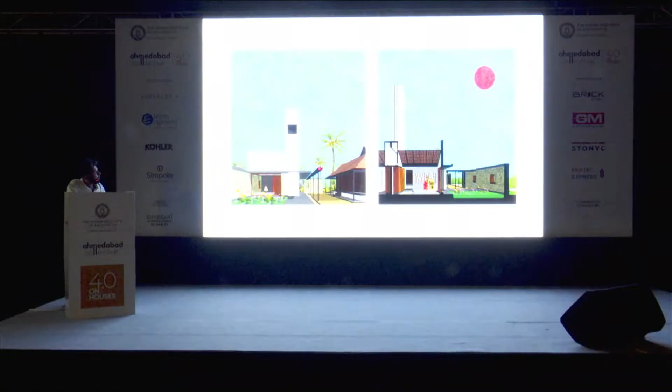But although received with great passion, the idea never took form. And after a painstaking year of drawings and conservation work on site, Kapi Madam was demolished to be replaced by another concrete structure. We withdrew from the project in the only form of protest entitled to us.

We were so naive. The project and the old structure are now lost, yet its loss was trying to materialize through other means.

The absence of Kapi Madam slowly insinuated the melancholy of its lost architecture, both the old and the new, in various forms of drawings that we did, artworks, graphical renderings.

By drawing an analogy to Aldo Rossi's 1975 engraving, Now This Is Lost, also known for its melancholic stance towards architecture, Kapi Madam now moved to its afterlife and began to inform our thinking and drawing in our practice.

Its next apparition was in the form of an artwork created in the stark, mute, melancholic, metaphysical painting style of Italian artist Giorgio de Chirico, whose work also was an influence for Aldo Rossi.

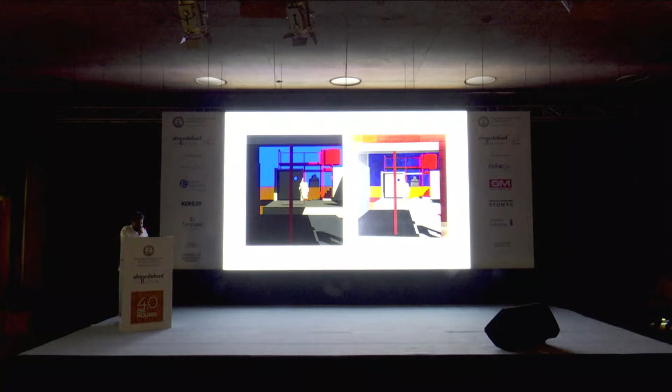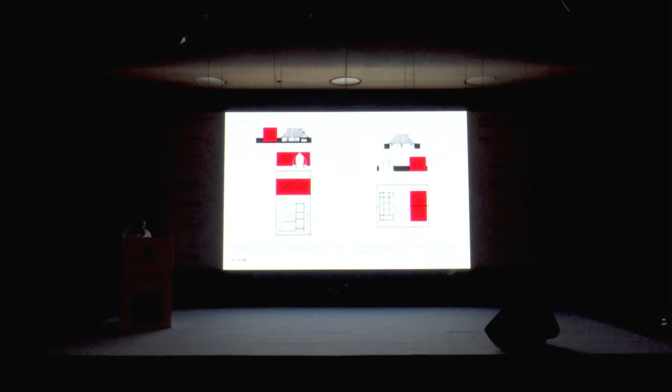Later, we adopted this style and method for various other projects and their artistic renderings. We also developed a typological method of studying and drawing a set of spatial guidelines and principles of order that manifest in our projects as logical conclusions and continue to inform our design process.

Perhaps stemming from our own naive and amateur understanding of the underpinnings of traditional houses like Kapi Madam, we started studying some of the generic qualities that the house itself presented.

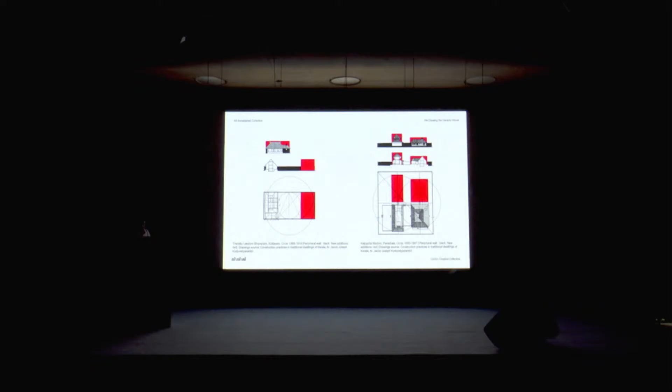Seemingly non-denominational rooms of equal sizes arranged around courtyards or verandas, which were interchangeably used by the members of the family in different ways during the daytime and nighttime.

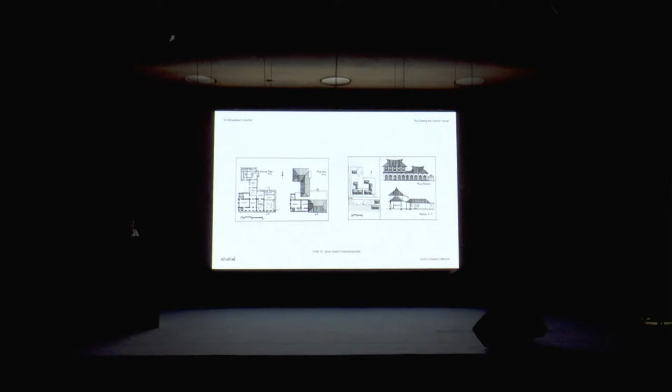We extended the study to several traditional type forms of houses, the Ekashalas, the Dushalas, the Trishalas, the Chatushalas.

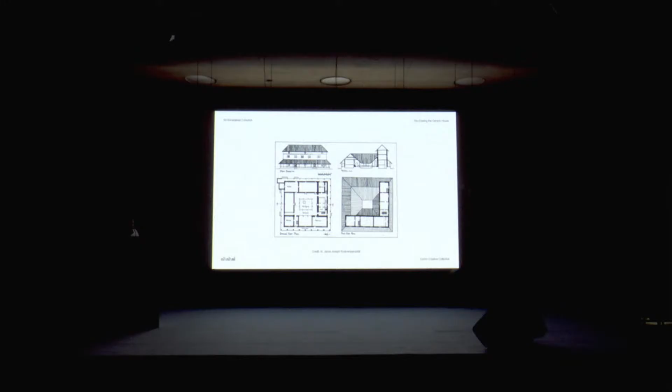Architecture, when unburdened from its past, history, and socio-cultural connotations, begins to exhibit some of the more universal spatial qualities of spatial order in its morphology.

Most of these houses also followed certain strict principles of climatic response and material tectonics, which were necessary parameters to build in the landscape of Kerala.

However, a deeper understanding of these houses, set in its historical and socio-ecological context, reveals meaning that is far from universal. They are formed and governed by domestic spaces and systems separated on the basis of gender, caste, and economic privilege. The red marked border, for example, here is where the female of the house should always exist.

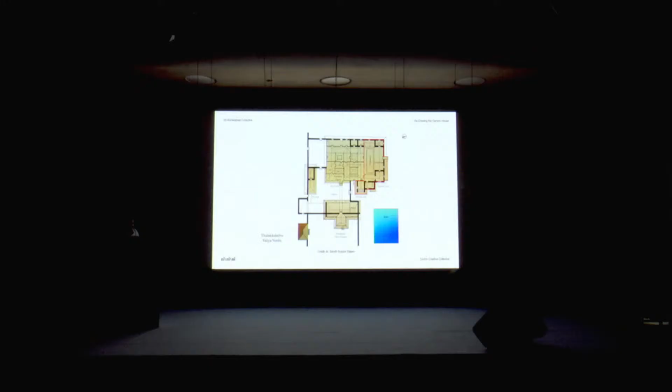So, three attempts that we start in our practice. We started questioning if an intimate knowledge of this power system prevalent in the traditional house forms could help us in the search for the truly generic house, one that is more equitable and universal.

Our attempt began with the sensibility of building with the presence of the old. How can time and memory become generators of design?

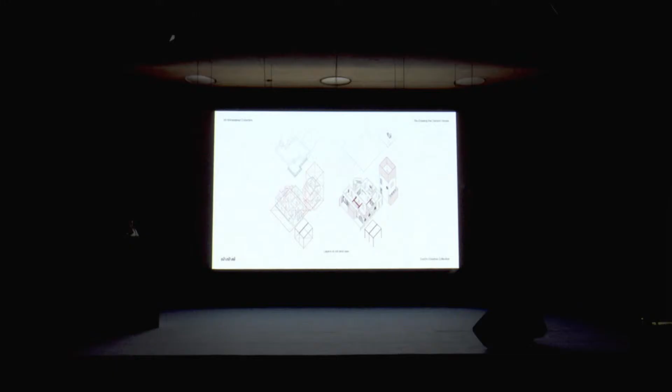Aldo Rossi, in his book, A Scientific Autobiography, quotes, 'The question of the fragment in architecture is very important, since it may be that only ruins express a fact completely. Photographs of cities during the war, sections of apartments, broken toys, this ability to use pieces of mechanisms whose overall sense is partly lost has always interested me,' Rossi says.

Even in formal terms, I'm thinking of a unity or a system made solely of reassembled fragments, says Rossi.

The notion of the fragment in Rossi's words speaks of the emotional essence of the home when read in parallel with the Austrian poet Rainer Maria Rilke's description of intimacy.

In the 1990 house, originally built as a working class residence in the rural outskirts of Tiruvalla amidst sugarcane farms, fragments of memory served as the symbolic core.

Like the traditional house typology, the 1990 house also seemed to exhibit certain recurring themes and logic of spatial order. A typical structure, the style of which is found in Kerala even today. The house is a single-story concrete slab house which is a 9-grid in plan where private rooms are arranged around a central hall. This house is my partner's own house.

The significance of the story of the existent house was important, and its memory formed an integral part of the new narrative as we considered our responsibility for what we choose to leave out. We withheld the urge to romanticize the image of the past and rather chose to use its remains as a stimulus to present a new aesthetic interest and a modern philosophical interpretation.

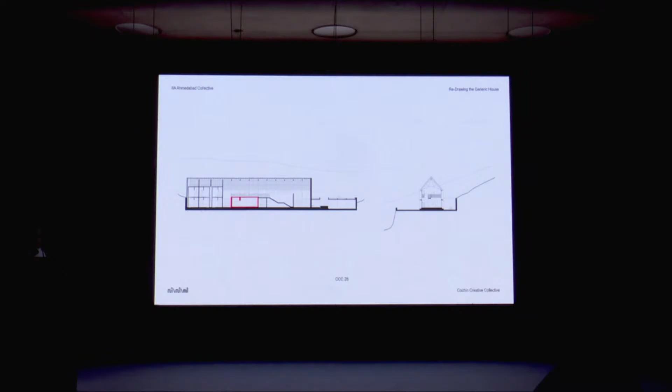The new architectural expression simplifies the whole into regular forms and strongly distinguishes the old and new as separate layers and materials. Concrete cement blocks, steel and glass used for the new construction now sit in absolute contrast with the stone walls of the old construction. The dialogue between old and new realized here is a conscious effort to create a unity made out of fragment.

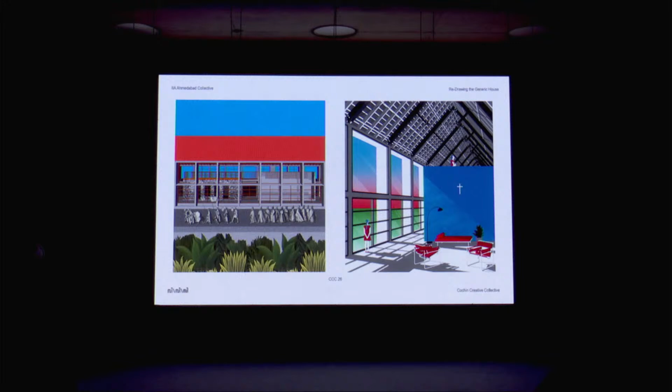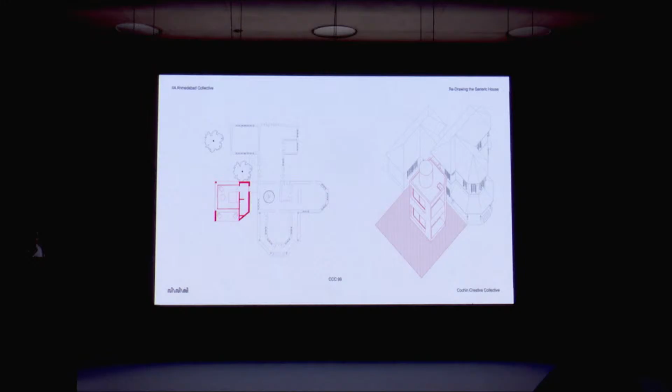Similar ethos prevailed while adding a new modern private bedroom block for the next generation inheritors of an ancestral home in Chalakudi. The new block's total dimensions was directly governed by the geometrical relationship with the old house.

In our subsequent studies from Kappimadam, we developed a method of abstracting ideas and types which began to make their presence felt in different other projects as constants but manifesting in varied ways. We developed a kit of parts which started to emerge every now and then in our projects, each time giving rise to a new meaning and responding to the specific needs of the project, site, and client.

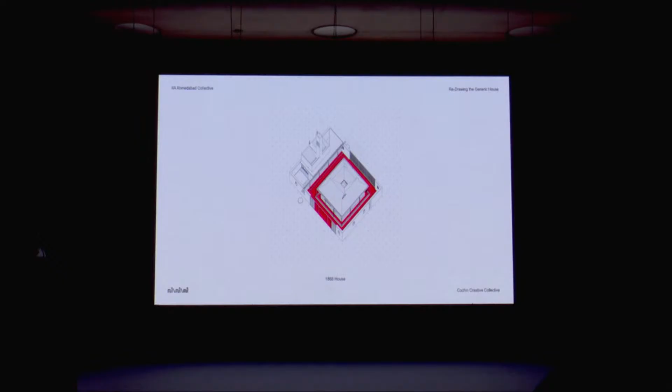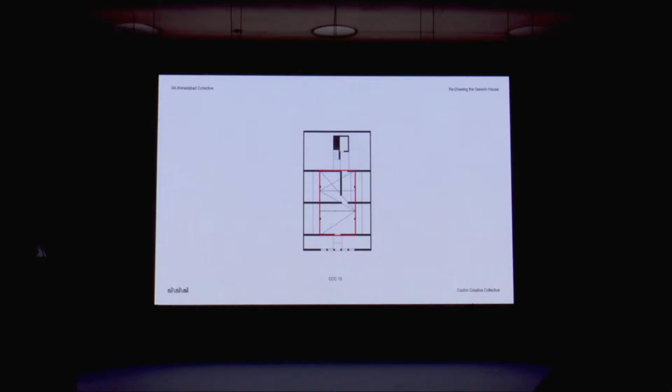One such logic of spatial order was that of the designation of private and public space as distinct forms. In most cases, there is a precisely equal measure proportioned spaces allocated to each sector, especially evident in some of our linear house typologies we have tried.

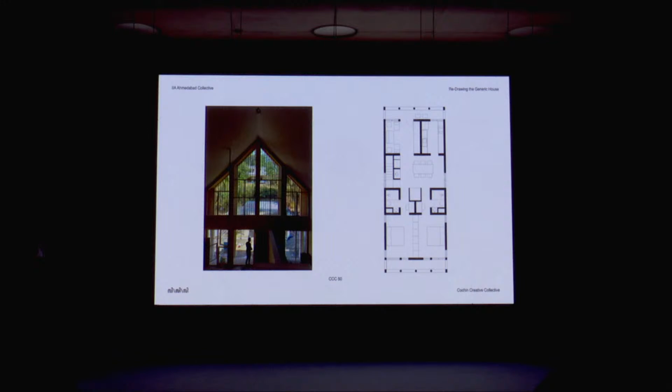These longer typologies share a similar proportioning system on the plans, with generous living spaces distinguished in height from private spaces. This family space, for example, in the Punalur house, measures almost a near perfect cube in its proportions. Similar systems are in place for two other houses in Tiruvalla.

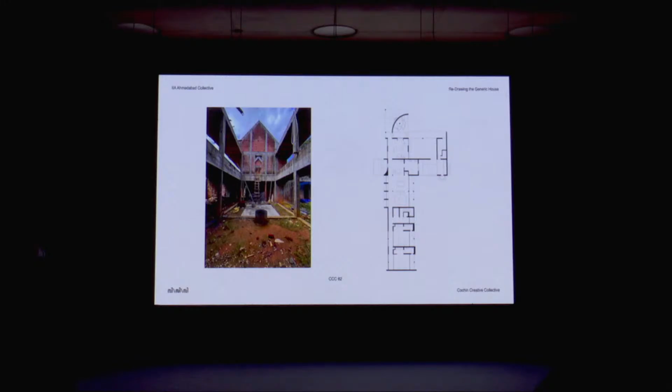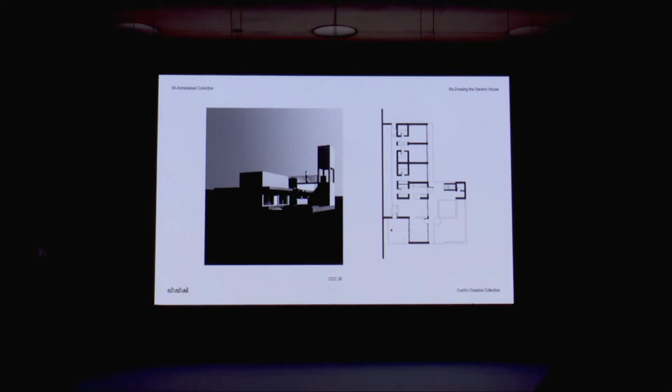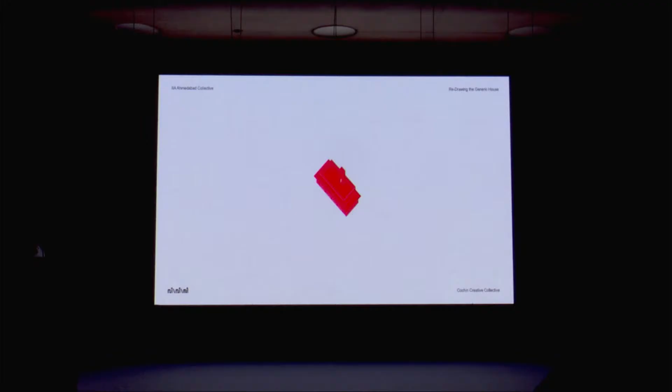In Cheppanam House, this typology graciously invites a courtyard and bold shapes within the composition. All of these elements and tools of organizing are derived from our continuing study of projects built and unbuilt. In this way, the recurring element of drawn projects began to exert their existence in the present. Recurring architectural forms that emerged in consecutive projects, upon their demise, are distilled and recorded in a new metaphysical plane.

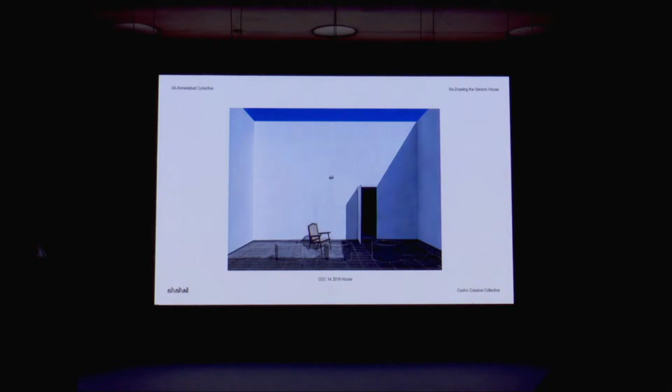Another construct was that of the room under the sky, something which began recurring from the deep pit we earlier redrew of our old project, the Kappimadam. At first as the leftover space in the roof of the Chammanad house, but in the subsequent project, it started claiming a more central and significant role in the house.

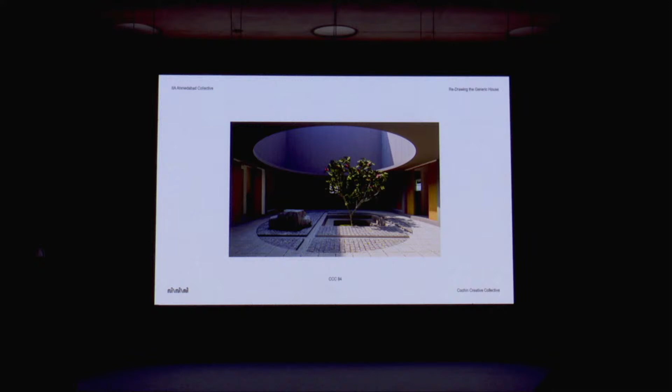For instance, in the Tekkumkara house, it not only became the physical center of the building, but it also is the emotional core, owing to the fact that it was built over the traces of an old house that stood on the site. The marking of the ancestral house were drawn and engraved into the courtyard, which brings the light, rain, and the breeze into the residence.

In the Changanasheri house, the room under the sky is a garden, providing a green lung in a tight site, which otherwise could not provide a green space on the ground. This here is the terrace of the house.

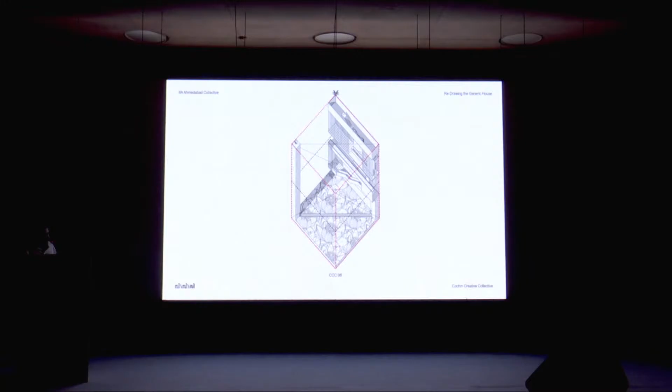What are the many different iterations of the boring cube? An academic exercise, the solo house with an inhabited wall on one side, a tower and a field reinforces a cube placed in solitude in space and time on a metaphysical landscape.

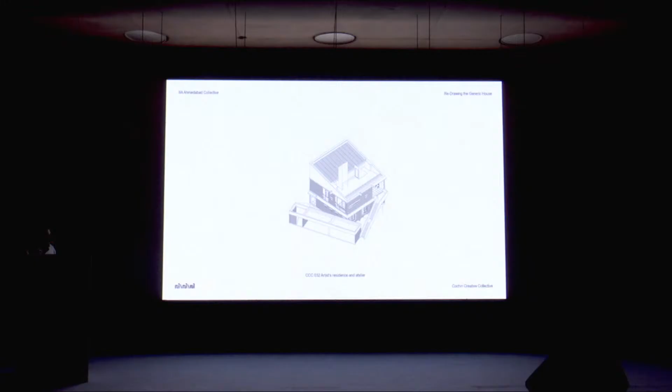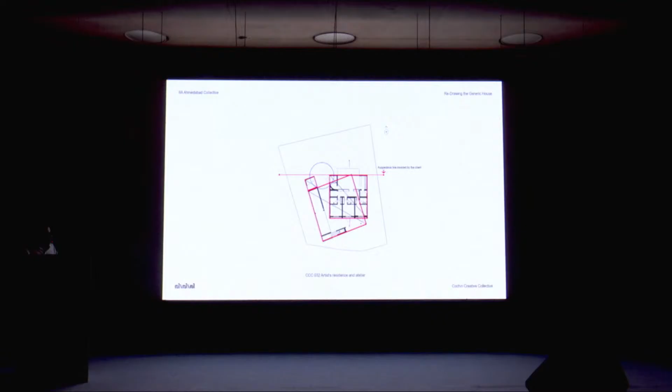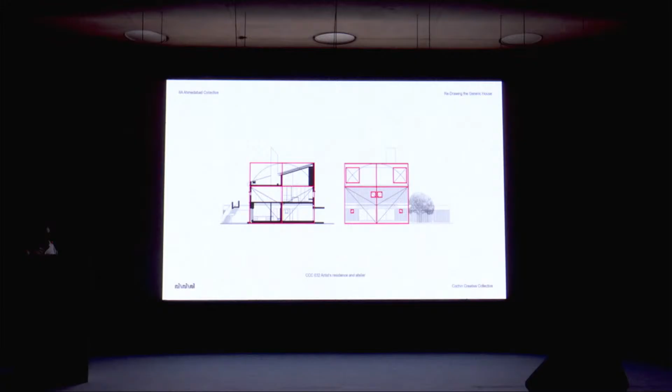Another attempt, the artist's residence and studio, is an exploration of modernism in a tropical context. The plan is composed of a cluster of additive forms with juxtaposing geometries. The carporch and staircase, set along an auspicious east-west line, set the composition. The main house, square in plan, creates tension with its auxiliary components. The house form is a bare cuboid, or rather the remnant of a truncated cube with symmetrically articulated openings.

The square plan is a humble version of the 9-grid, simultaneously taking care of the house function on the ground level, while the upper level houses the artist's studio. The humble 9-grid spatial layout is enlivened and made unexpectedly sumptuous by the elegant expression of its volume and the precision of the fundamental parameters of symmetry, order, and repetition.

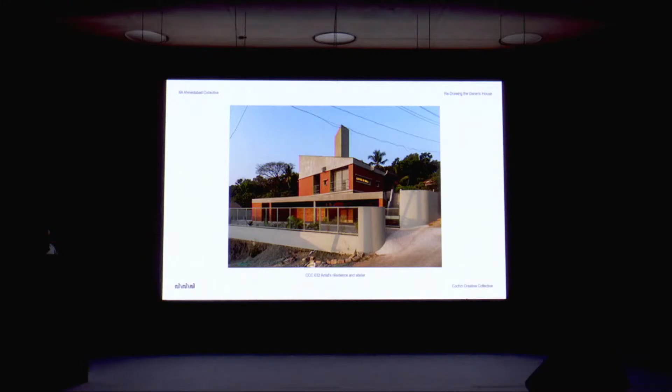Located in a compact mid-sized plot on the city outskirts, surrounded by a verdant landscape of green fields, it stands as an object in the landscape.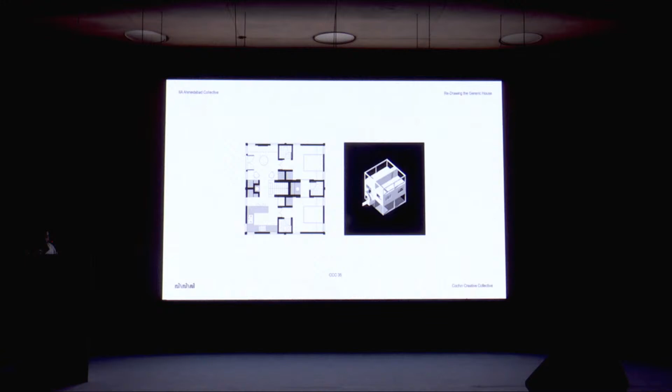More objects in the landscape followed, this time in the flood-prone areas of Alleppey. The house on stilts is another 9-grid, almost anticipating the later projects to follow. Another house in Ollur and a house in Edatwa loosely follow the same line, with the latter showing further interest by absorbing and standing up on an interlocking cylinder form at the center.

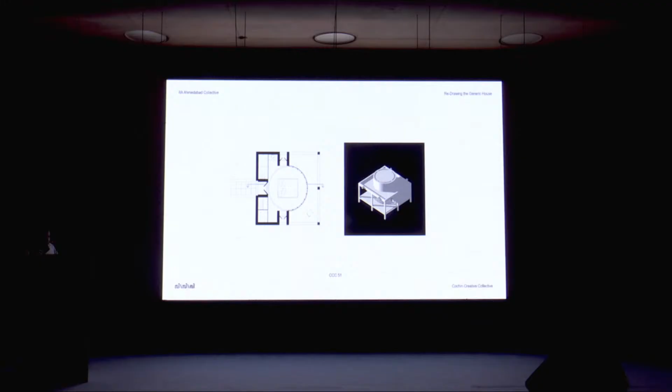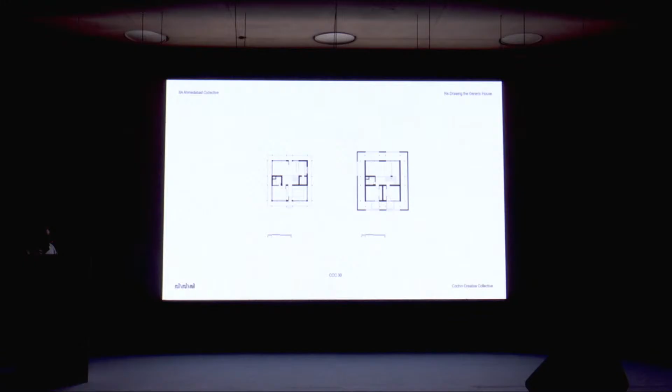The house in Puthankurus consistently builds on all the cues developed within the cube iteration attempt. We have used the cube time and time again in various manifestations to suit the requirements of different clients, and each time it has provided appropriately suited results, particularly in the first option of the A2 Manur house. The form emulates the geometry of the traditional house marked in red, with low hanging eaves, and the volume of the house matching the height of the pitched roof.

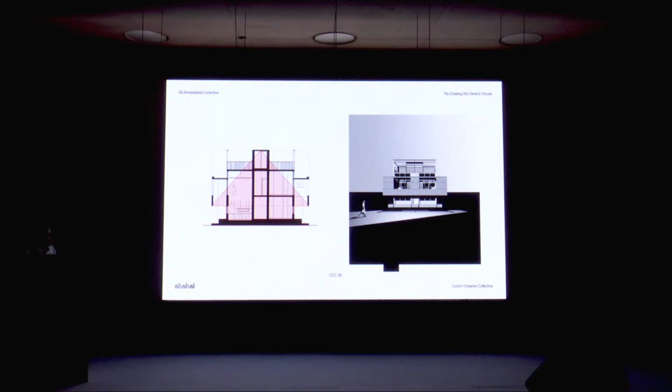Another attempt was the autonomous blocks, a way of assigning individualistic formal definition to different programs within a domestic setting. In Kanyampura house, the private spaces of the bedrooms are enclosed within cuboids placed within the more open plan layout of the house containing the social spaces.

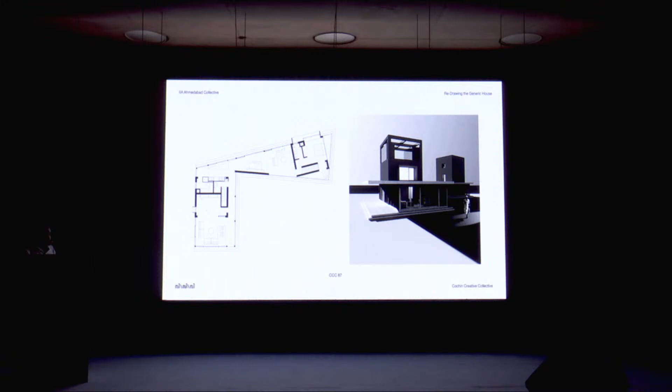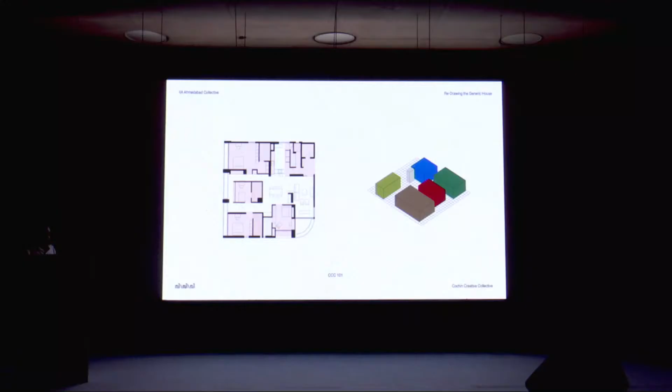The same logic applies in the interior design of an apartment interior, where each room takes on a hue of color and expression. In the Trikakara house, in an attempt to save the trees on the site, each program is assigned a more or less equal bay and arranged with least disturbance caused to the trees.

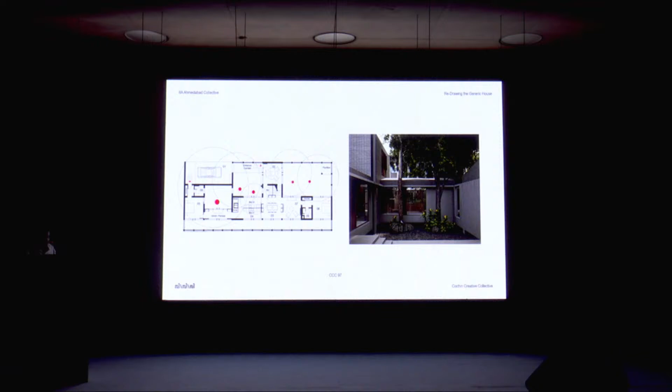The last attempt relates to one of the most prominent themes that stood out through our study of traditional houses in Kerala: the absolute, indelible presence of hierarchy in the organization and usage of space. When scrutinized as just objects devoid of any baggage, these houses tend to present a non-hierarchical ordering of spaces. But in reality, life never unfolds that way.

Across all religious communities, houses such as these were built for the upper section of society only, and displayed a blatant division of space according to the place and position afforded to each individual in the house. We wondered if it was possible to rewrite these spaces and make them more democratic and equitable.

We always loved the works of Italian radical architects Archizoom and Superstudio. Their visionary practices professed a new polemic of democratic, non-hierarchical spaces that remain relevant to this day. Their result has been an influence on a generation of architects like us, thinkers and practitioners. One of the most iconic works to come out of this was Superstudio's universal grid, a generic plane that would absorb everyone and everything.

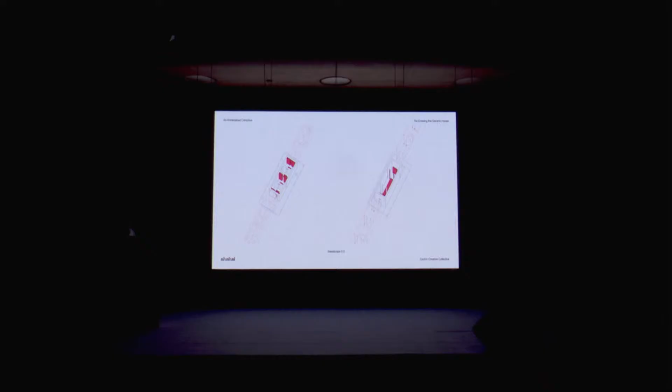The residence at Cherthala is a critical experiment along this line of investigation that we engage in within our practice, exploring a non-hierarchical, inherently democratic, and seemingly infinite multiplying space. We perpetually experiment on the idea of the universal room that is devoid of program and context.

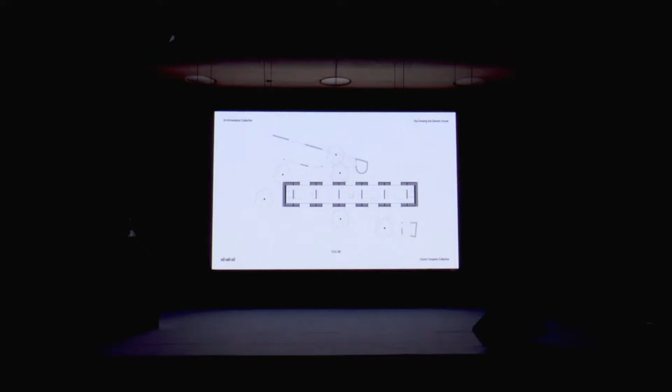Resembling the traditional houses of Kerala, which are organized in a series of rooms one after another, the rooms in this atelier house also follow a strict linear order. This is also a house for our dear architect friend, who is also a photographer.

Not only are these rooms identical in size and volume, they are interchangeable in regard to function. It can turn from an intimate bedroom to the social space of a kitchen to the entertainment venue of the living room.

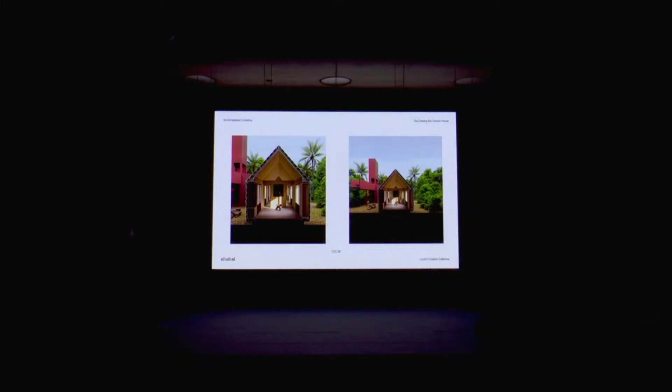In order to emphasize the similarity of the rooms, the entire built structure is imagined as a monolith by restricting the building to a limited palette of materials. The walls and roofs are both made of terracotta tiles. Endemic to the tropical context, the window openings in the monolithic form are lined with red sandstone to camouflage them into the singular form.

On the inside, the surface is lined with birch plywood on the walls and ceiling, and cement tile flooring matching its color. The use of mirror surface in the last room also ensures the illusion of infinity, extending space to infinity, as in the monumental landscapes of Superstudio.

But in the 2020 house, the question of hierarchy is reversed. The question of hierarchy was brought to the fore again, rather than relegating domestic functions such as cooking and eating to the back of the house, hidden from view, as seen in traditional houses. In the 2020 house, it became the center of the house itself.

One of the most primitive and symbolic cosmic centers of a home is often the hearth, the form of which varies from place to place. Resonance of the hearth can be analyzed in many iconic works of art and archetypes of home, making it one of the most primitive aspects of dwelling to have continuously re-emerged in architecture through time.

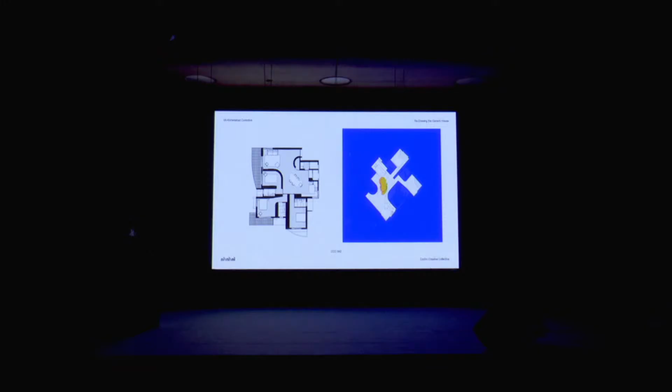Our logical interpretation of the hearth as an architectural element was in the form of the table. The symbolic and functional role of the table as the stage for cooking, eating, playing, working, doing homework, socializing, and so on brings together the most intimate functions of a home.

In this house, designed for a globe-trotting couple, their daughter, and their collection of books in the seaside city of Kochi, Kerala, the table fulfills the role of the hearth and becomes the heart and soul of the space. Being a very close-knit family of three, the centrality and vantage point of the table draws them close together at any time for shared activities of living.

The table becomes a bespoke, sculpted element distinct in its materiality, finished in polished wood. It exudes warmth and intimacy, evoking our deepest memories and architectural experiences of the kitchen and the home. The white, seamless walls seem to flow from this sacred core, forming a pristine and pure architectural form, seemingly devoid of the burden of contextual gestures.

The expression of the house as a monolithic space emphasized the hierarchical prominence of the hearth. As a first strategy, we brought down walls in the common areas and introduced a curvilinear geometry of white plain walls. This achieved an uninterrupted spatial layout bathed in abundant natural light.

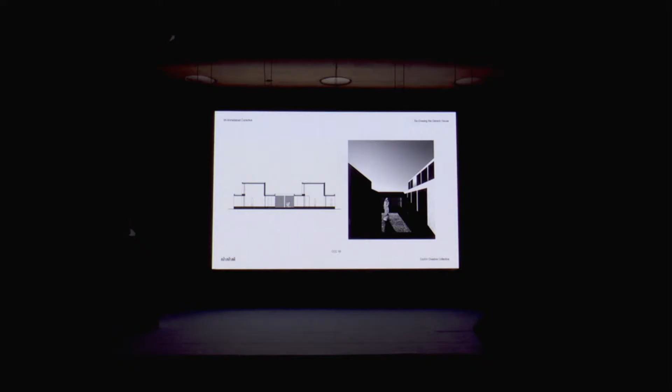In the Perambra house, set in a lush landscape surrounded by paddy fields, one sees the simultaneity of the presence and absence of hierarchy. The young client desired a space of refuge to be placed in the landscape, which could elevate the experience of the surroundings from within the home.

The rectangular form of the house was placed parallel to the paddy fields on the western side, and from its length, an excavated square court formed on the right side, that is on the east, in the presence of a grove of areca palm trees and a mango tree.

The service spaces, such as kitchen, bathroom, and study, were placed on the eastern side and expressed a solid edge cutting the view of the paddy field as one approaches the house.

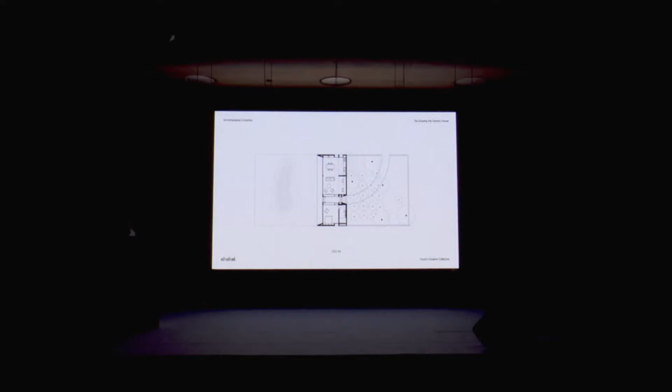The living, dining, and bedroom spaces are placed facing the open side with an ever-changing view of the paddy field and lush greenery. The non-denominational nature of the program is visible here, with every room getting similar access, view, dimensions, and light quality.

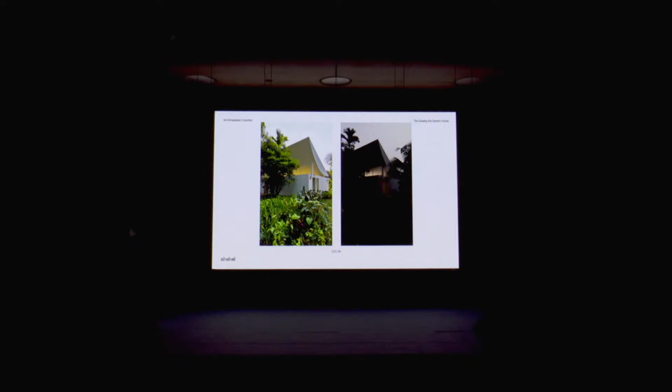To welcome the dappled morning light on the eastern side, trickling through the canopy of the large mango tree, the roof was imagined as a part circle, gently curving. The surface of the concrete roof gets washed in the morning light as well as the evening light. It appears to be levitating.

At the lowest point of the curved roof, it swoops down to frame the view of the paddy field on the western side.

As one enters the house, the panoramic view is emphasized by the form of the curvilinear roof floating on top of concrete columns. The morning sun hits the curved surface.

The geometry of the universal grid becomes particularly efficient in this new attempt by providing infinite possibilities of arrangement. In the Coonoor house, for instance, every room is offered a fantastic view of the hilly landscape around it.

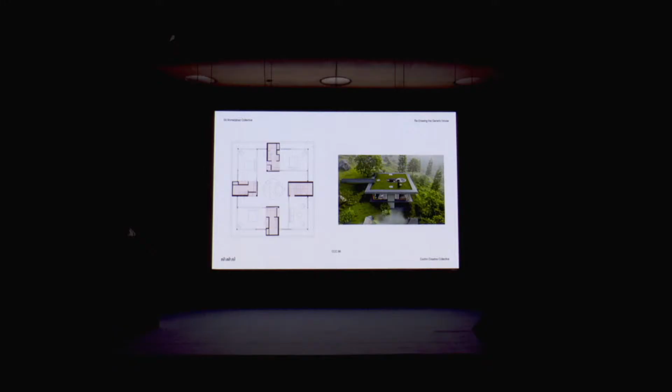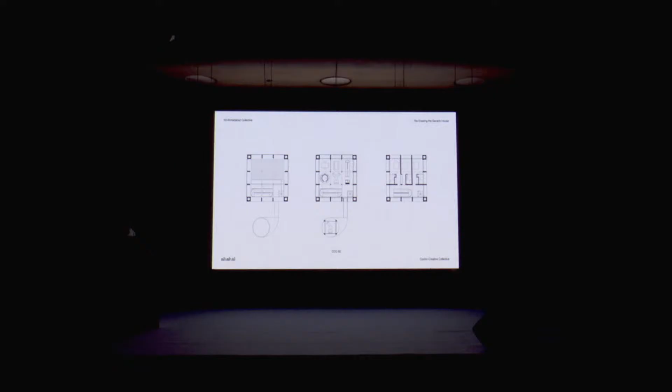The exploration of the grid plan was taken one step ahead in the residence designed for Arun and Ashwati in Ernakulam. It's a 9-grid plan with equal dimensions.

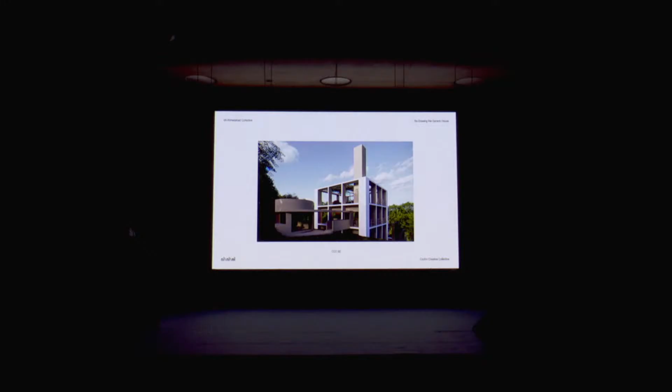This was further extended as a second option for the same client, which became a 16-grid plan with one floor, of individual squares assigned with interchangeable domestic functions.

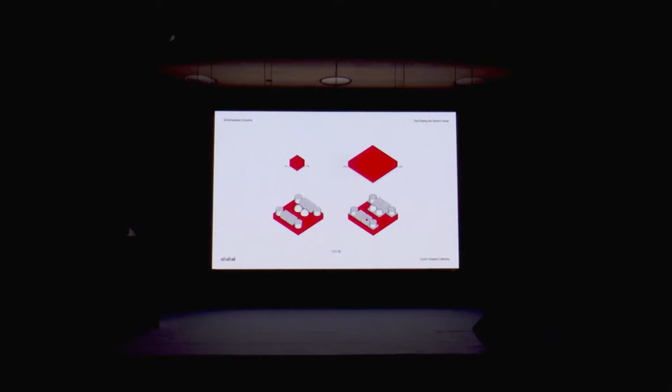Each grid is expressed distinctly with a roof form, forming an almost sculptural insert in the landscape. The roof form also brings in light to the interiors of the house.

Emulating memories of the rooms in traditional houses, where some rooms have doors on all sides leading to other rooms or to the outside, the Arun Ashwati residence becomes a new exploration in the series of non-hierarchical, generic houses that we have attempted.

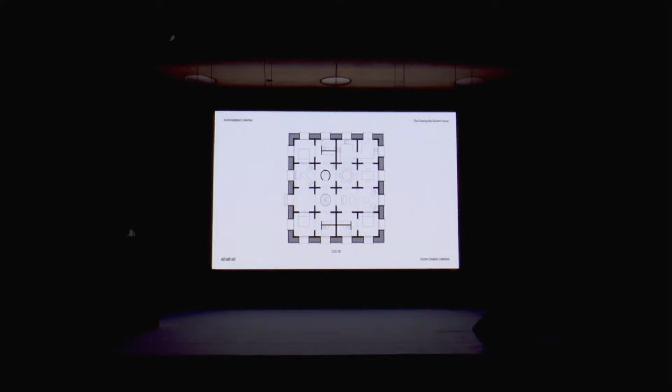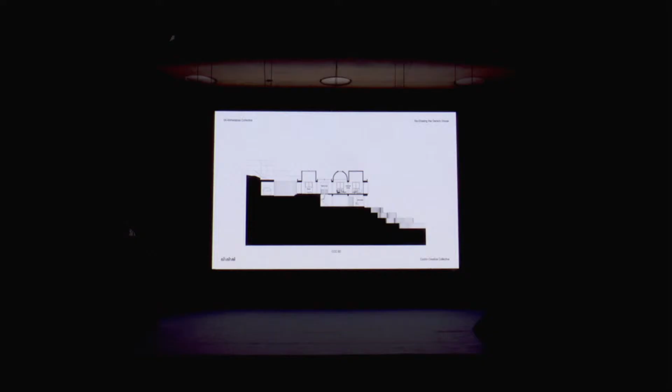Although the rooms are identical in plan, through sections and volumetric expressions, the rooms experience different qualities of light individually, and therefore comes a variation.

There was a sound to this particular. Yeah, there was a background.

Though the rooms are equal in sizes and measure on the plan, the sections make each room individualistic in terms of ambience, daylight.

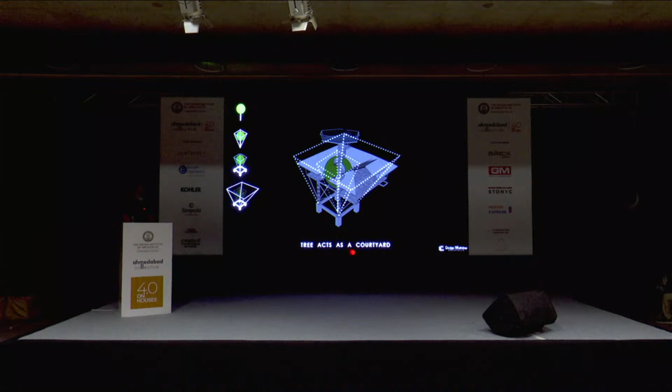So tree is nothing but an inverted pyramid, and the house started happening around the tree. So the tree became a courtyard, and the house is 45 feet above the floor of the forest, because it's on the slope - this is like 45 feet above the forest. It's on 4 columns, and the house happens around it. And this point, which is called the crow's nest, is 75 feet above the ground.

This has been a completely green building. When we did this house, there was no electricity, completely no electricity, no roads. So the whole house was built in Pune - it's a nut and bolt structure. It was assembled in Pune.

Dismantled, brought to site. And that's when it hit me, that when the pieces came, there were hundreds and thousands of pieces of the house, and nothing was numbered. Nobody knew except one guy who had done that. And this place is in a forest.

That's when I lost it - this guy was not even from Pune, he was from Latur, halfway down in Maharashtra. I realized that if this guy walks out for whatever reason, I'm screwed, because I have hundreds of pieces and nobody else knows. The client trusted me, and everything would become junk since there was no way to put it back. So every day I'd leave at 7:38 in the morning, reach the site, and make sure this guy doesn't leave. For the next 3 months of my life, it was only this - making sure he doesn't run away. And he didn't.

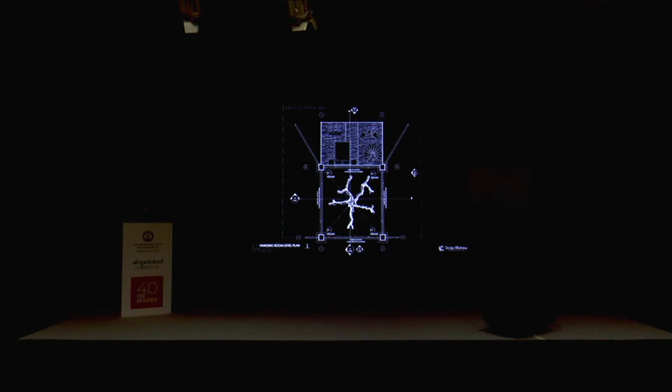So this is the tree. This is like a living, dining, and a bed over here. Kitchen, toilet, staircase that goes down. There's a room which is hanging - it is supported only from the top, it doesn't have any other support. And what you have over here, a staircase going up, is a sleeping balcony.

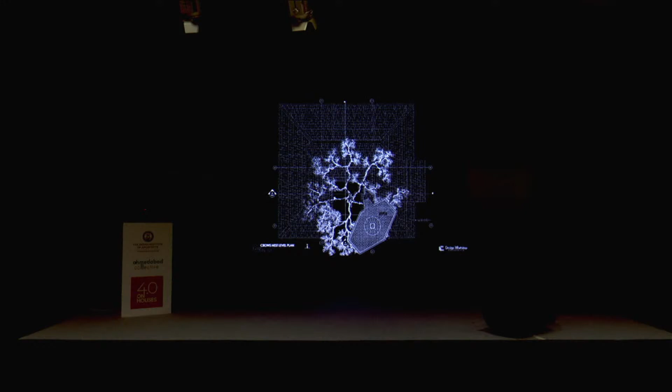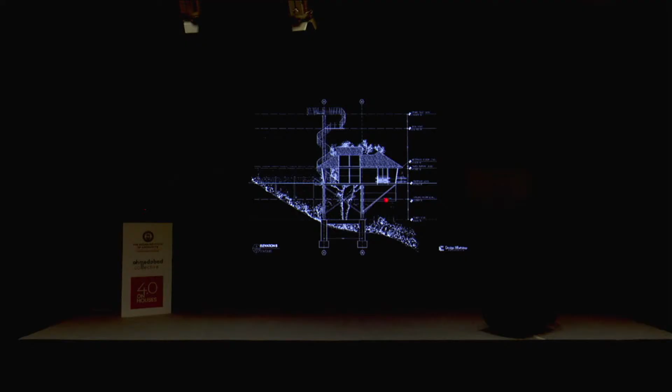And the roof is Mangalore tiles. So again, as I said, there's completely dry construction. That's your sleeping balcony. That's your hanging room - it's suspended from the top. I got a few images of the making of the machan. It overlooks the valley - there's no human construction for miles together.

And in between, for a month, the work had to stop because there was this anti-North Indian thing happening in Maharashtra. All the UP and Bihar guys just left Maharashtra, and the carpenter was a UP guy, so suddenly the whole site came to a standstill. But even with that, we were able to wrap it up in about 6 months.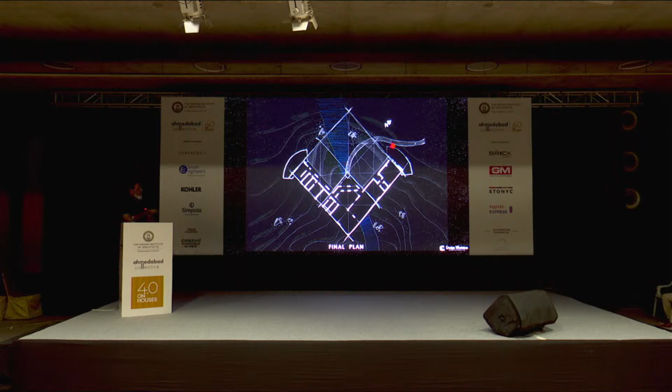So this is your waterfall. There are two wings. One is a bedroom wing, which is private, and this is my living room, kitchen, and dining. You enter through a bridge. You walk down 100 feet, and then you enter the house through the bridge, because there is no road, you can't make a road.

So again, this is your entry. That's the waterfall that comes down. Then from over here it goes further.

So imagine all this steel. Karjat is a very hot place. So during 3 months, when the temperature goes up to 46, 48 degrees, the work would start at 7 in the morning till 11, and then again at 5 in the evening till 9 at night, because the steel would get so hot you couldn't handle it. There was no way to build it otherwise.

And as I said, it took me 9 years to complete this. We started in 2011, and completed it in 2020. And again, with the belief of Satish, the owner, this house was not possible otherwise. Somebody else would have just given up. So yeah, this is Satish, the owner of it.

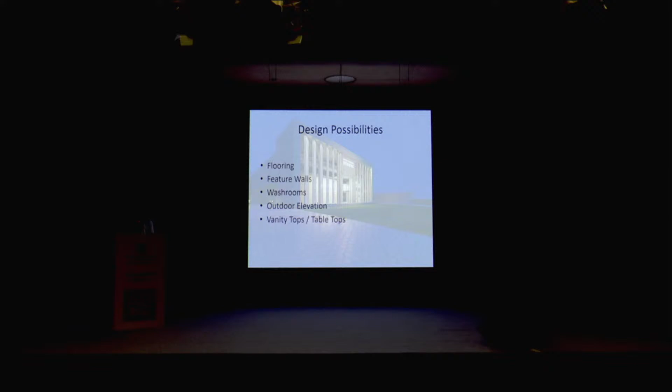Our commitment is very simple: quality, elegance, and service excellence. We ensure that every piece we deliver reflects the luxury your project deserves. I want to say to all the architects and designers, we understand the vision and design needs of architects and interior designers. Our role goes beyond being a supplier. We are your material partners, helping you select the right stone to match your design vision, mood boards, and project theme. We invite you to visit our showroom, explore our collection, and experience the world of Stonyc. Let's collaborate and create timeless spaces together. Thank you.

Next, we move on to an engaging panel discussion on the topic of contextual translation and design methodologies of a house. We all know that architecture needs to respond to its surrounding context. A house becomes more than just a shelter, but a reflection of its place, culture, and climate. Through this discussion, we shall try to understand and interpret the social, cultural, and environmental layers of a site that eventually lead to a meaningful spatial design.